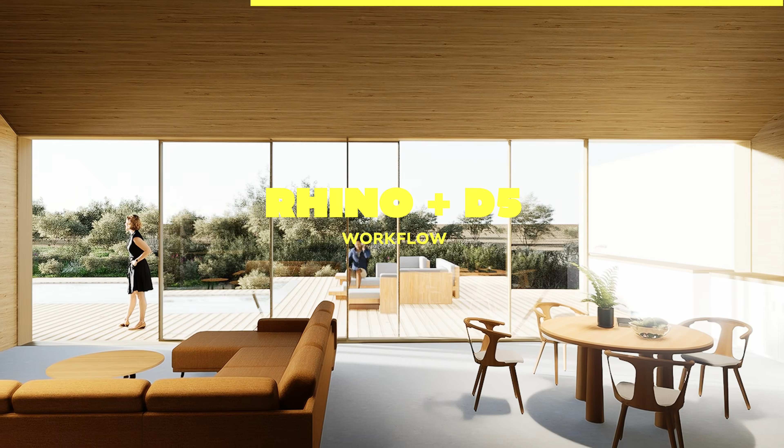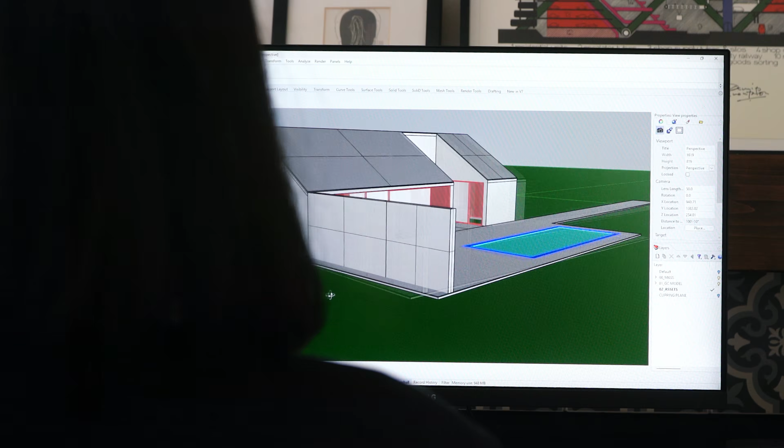Most architecture projects follow the same journey. It starts with an idea, then a model, then visualization, and then finally a presentation. But somewhere along the way, we end up spending almost as much time moving files between different software as we do actually designing. So when D5 invited me to try their new Rhino workflow, I wanted to answer one simple question: can one workflow really take a project from concept to visualization to client presentation without ever leaving Rhino and D5? In this video, I'm putting this workflow to the test.

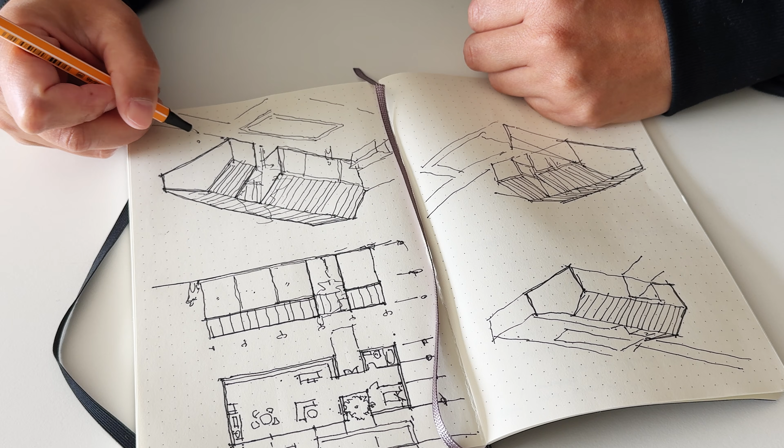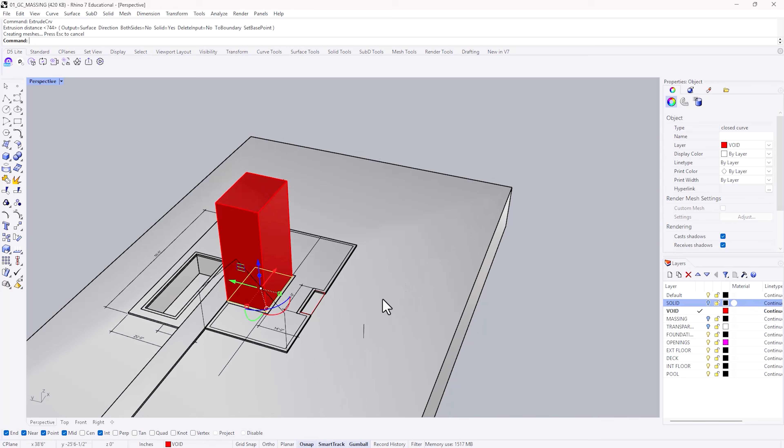When I start a project, I usually begin with a sketch, and then I move into Rhino to explore different massing ideas. It's the stage where I'm testing proportions, refining the form, and figuring out how the building fits together. At this point, I'm constantly making changes. I'll move a wall, adjust a roof line, rethink an opening, or even change the entire massing. It's a very iterative process.

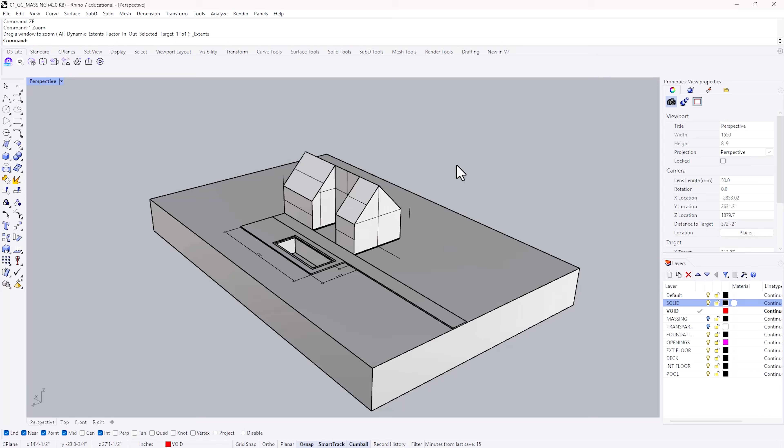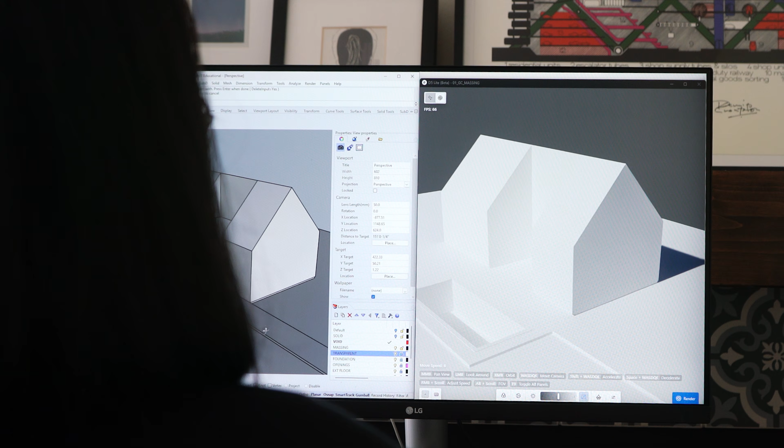The problem is visualization usually doesn't happen until much later. Traditionally, if I wanted to see what these ideas actually look like, I have to stop designing, export the model, open another application, wait for everything to sync, and then start building the scene. It might not sound like a big deal, but when you're making dozens of small design decisions, this interruption really starts to add up. And every time I leave the modeling environment, I lose a little bit of that creative momentum. Instead of asking, is this the right design, my workflow is interrupted.

One thing I've learned over the years is that the earlier I can experience a design, the better my design decisions become. Drawings tell me how a building is organized, but visualization tells me how it might actually feel. If I can get that feedback while I'm still designing, not after the design is finished, that's a workflow I'm interested in.

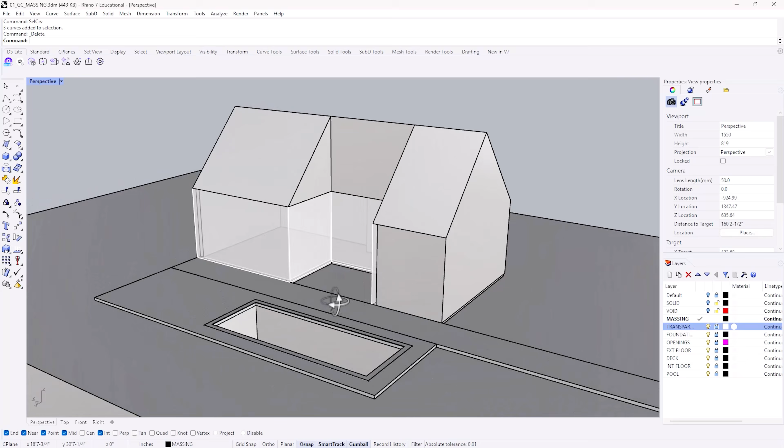Let's start with the new D5 Lite for Rhino. Instead of waiting until the project is finished, I can start visualizing the project while I'm still designing without ever leaving Rhino. At this point, the architecture is still very simple. I'm not thinking about materials or polished renderings quite yet. I'm just trying to understand the building.

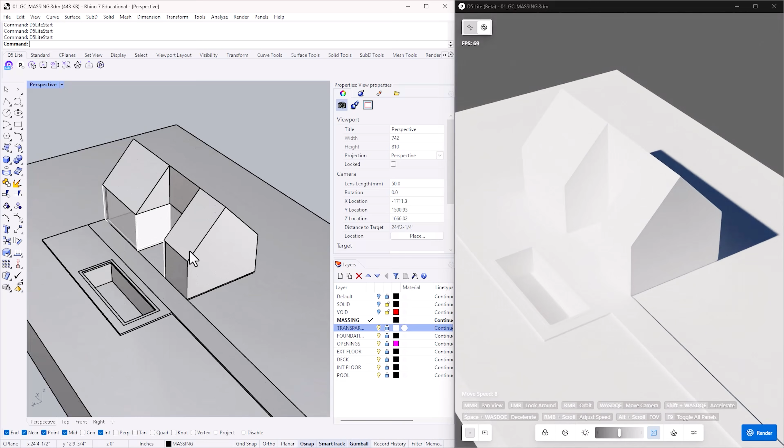To launch D5 Lite, simply open the D5 Lite tab in Rhino and then click Launch. As I continue working in Rhino, D5 Lite gives me a live preview, so every design change updates in real time. Once I find a view that I like, I can save it directly in the scene list in D5.

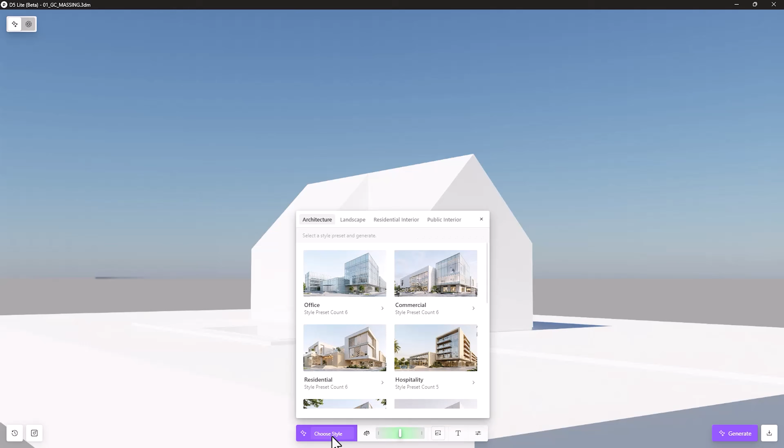Now let's try the AI mode to quickly explore different design ideas. I'll start by selecting a preset style. For this project, I'll choose architecture, residential, then villa. I can also adjust the structure weight depending on how closely I want the result to follow my original model. I'll set it to creative to explore a wider range of possibilities. I can also add a reference image or even write a text prompt to guide the generation. Once everything is set, let's generate a few concepts.

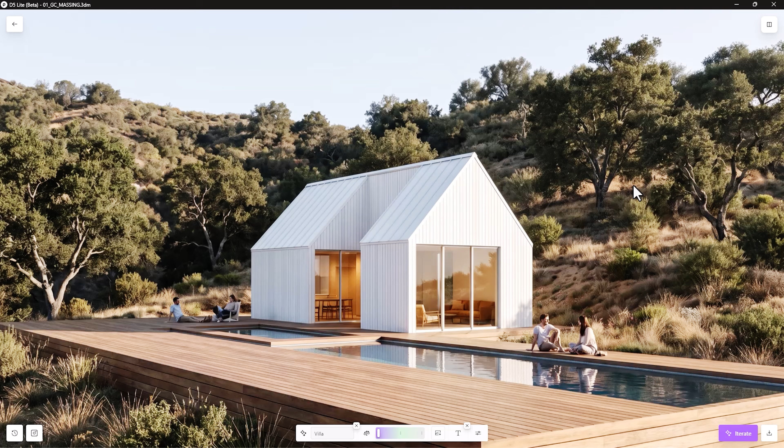Instead of spending time building every detail, I can quickly explore different visual directions from the model I'm already working on. It's not about replacing the design process. It's about exploring possibilities I might not even consider on my own. Sometimes it reinforces the direction that I'm already heading. Other times it encourages me to ask, what if I tried this instead? Either way, it gives me valuable feedback much earlier than the usual workflow.

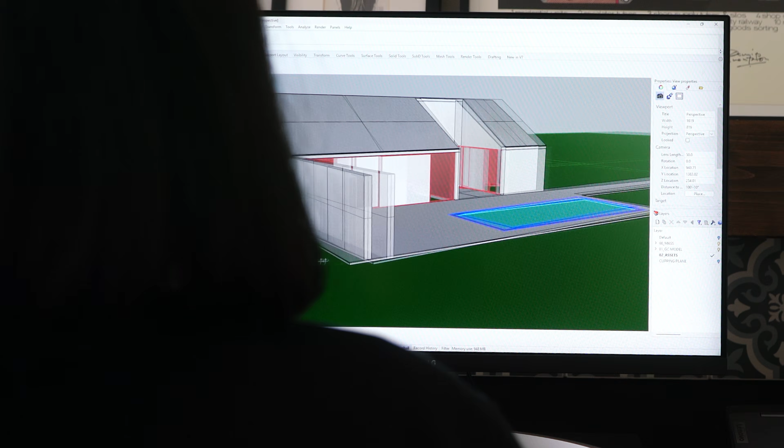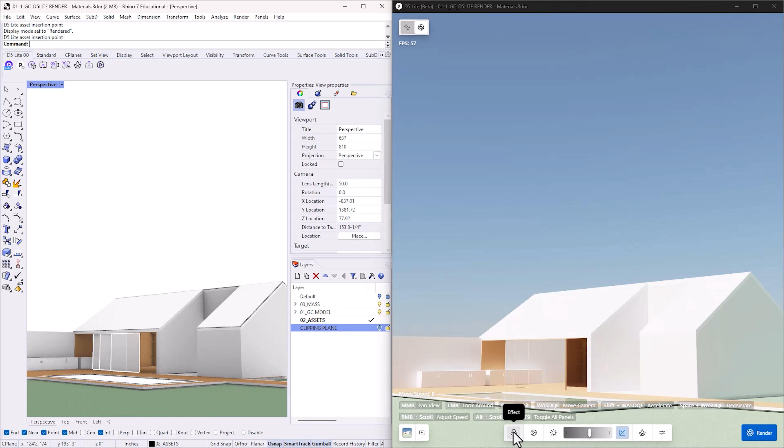Based on the AI feedback, I made a few adjustments to my model. Once I have a direction I like, I can switch over to render mode to create a quick image of the project. Even at this early stage, seeing the building with lighting, shadows, and basic materials changes how I evaluate the design. This is probably the biggest difference I've noticed so far. Visualization isn't becoming the final step anymore. It's becoming part of the design process. Instead of waiting until everything is modeled before seeing the project come to life, I'm getting feedback while the design is still evolving.

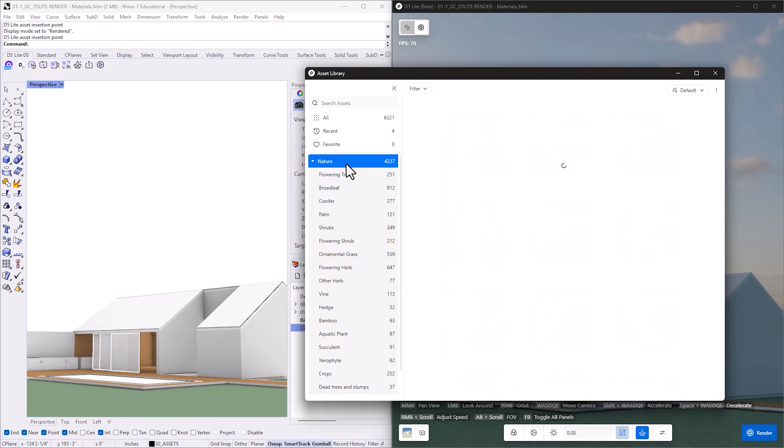And it's changing the way that I make design decisions. At this point, I'm generally happy with the overall direction of the design. I made further adjustments in my Rhino model. The form feels right, the layout is starting to come together, and I have a much better sense of the visualization I'm trying to create.

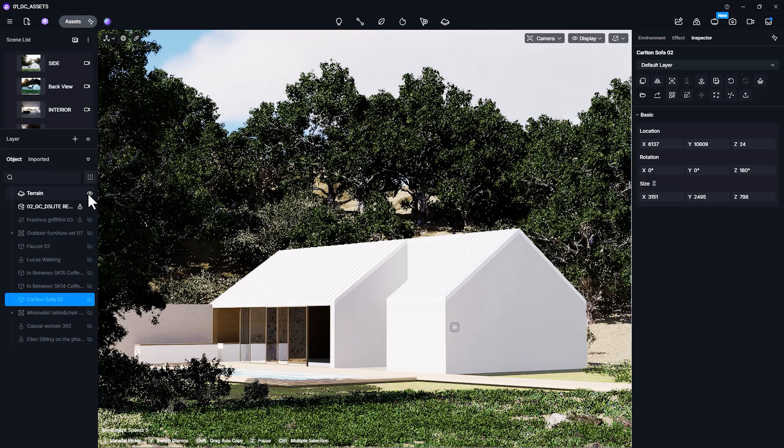But a building doesn't tell a story on its own. To communicate the space, I need people, furniture, vegetation, and all the little details that make the project feel believable. That's where I usually spend most of my time.

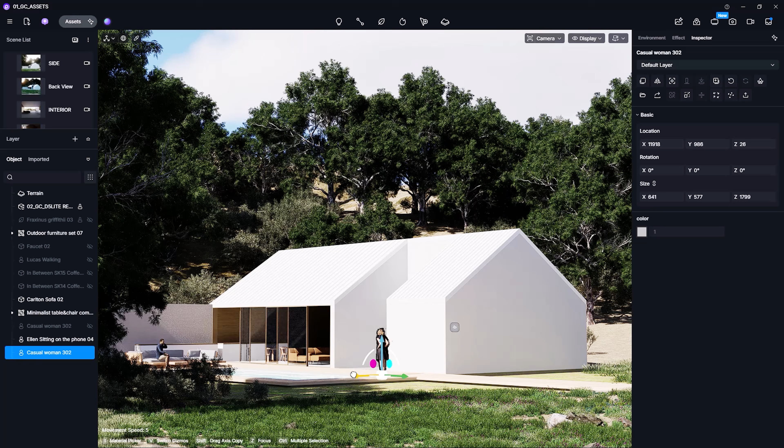Traditionally, this means searching through different asset libraries, but with D5 Works, these assets are built directly into the workflow. So instead of going to a variety of asset libraries to look for content, I can simply browse and get my asset in one place from different creators in D5 Works.

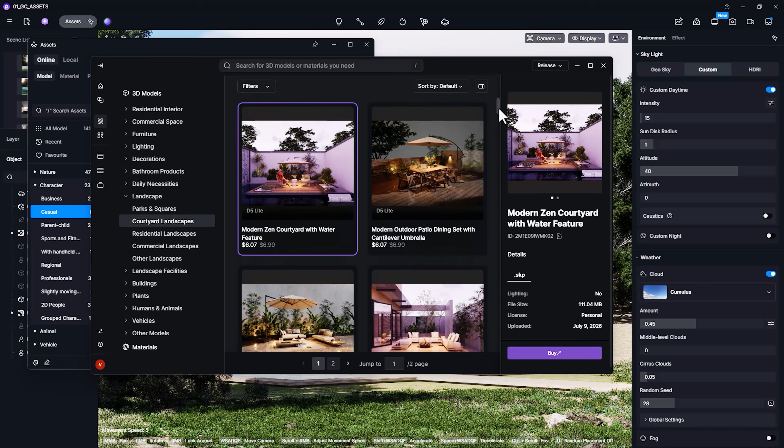In D5 Works, you can filter by file format, pricing, availability, file size, and license, which is super helpful when searching for the right assets. You can even upload your own custom asset into D5 Works.

At this point, the project is really starting to come together. The overall composition feels right, but this is where the smaller details begin to make a difference. I've continued to refine the design and made adjustments to my Rhino model. Now it's time to bring the project to life with D5.

D5 3.1 introduced a number of new tools that help refine the scene before it's ready for presentation. One feature that I really like is the seasonal vegetation. Instead of manually swapping trees and plants, I can quickly explore how the project looks throughout different times of the year. It's a simple addition, but it completely changed the mood and atmosphere of the rendering.

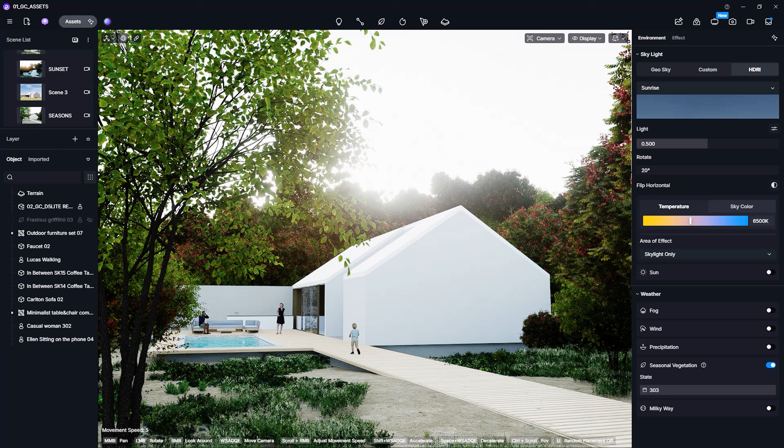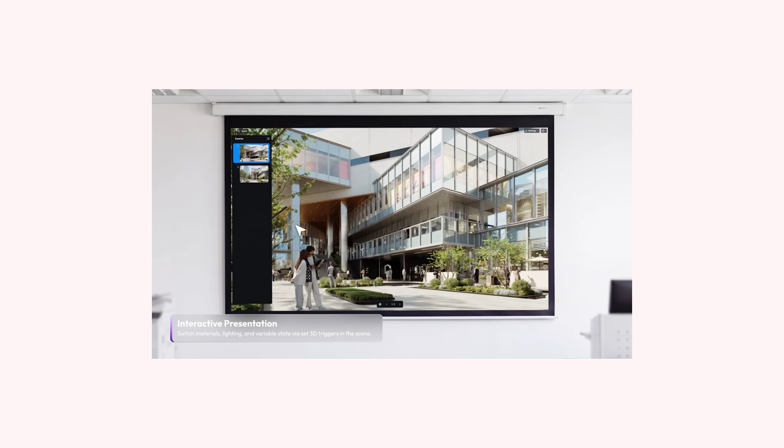But the update I found most helpful is the interactive presentation. This allows me to create and present different design options directly to my client. With my previous workflow, I had to export a series of renderings, build presentation slides in another application, then switch back and forth between different software.

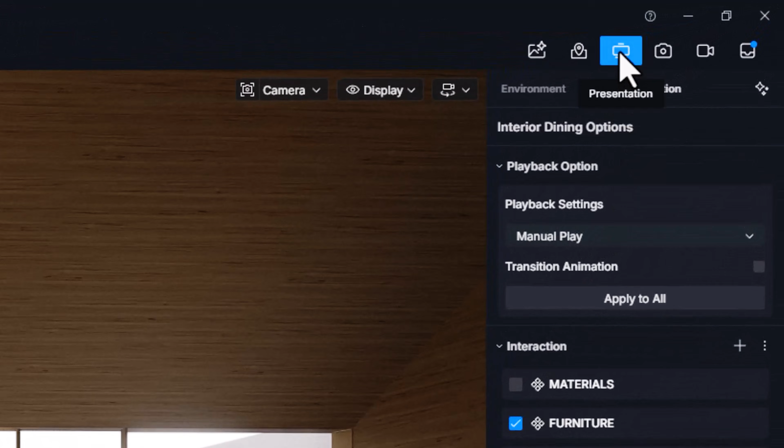With this new update, I can use D5 Render as my presentation tool, allowing me to show different design options without ever leaving D5. To do this, just go to the Presentation tab. Here, I already created my own slides with different design options. I can present different ideas to my client without ever leaving D5.

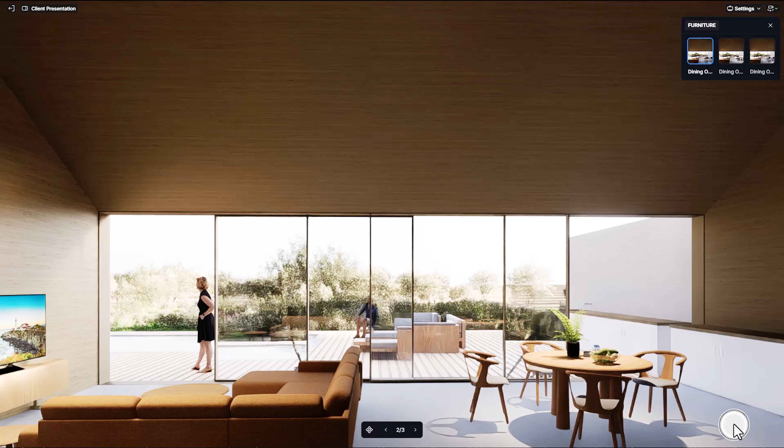You can toggle different material options within the slides, different furniture options, and even different time of day. It makes the entire process much more seamless. The presentation also becomes more interactive. Instead of clicking through a series of static images, I can explore different ideas together with my client in real time.

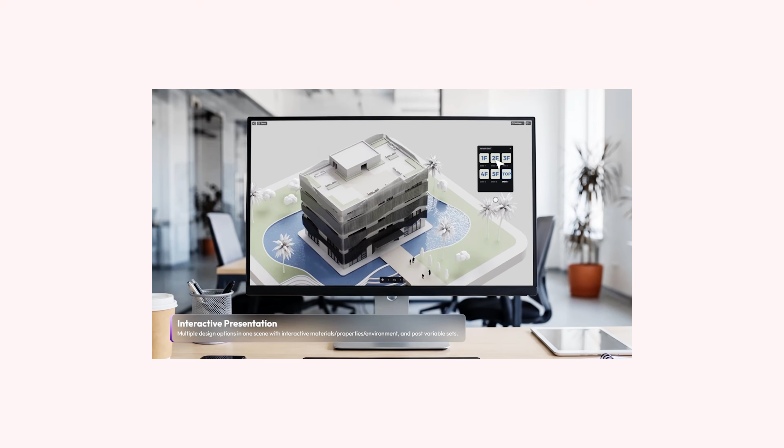So after taking this project from concept all the way to a client presentation, I can say this workflow really surprised me. What impressed me most wasn't just how quickly I could create beautiful visualization, it was how naturally everything is connected. Instead of treating visualization as the final step, D5 made it feel like part of the design process from the very beginning.

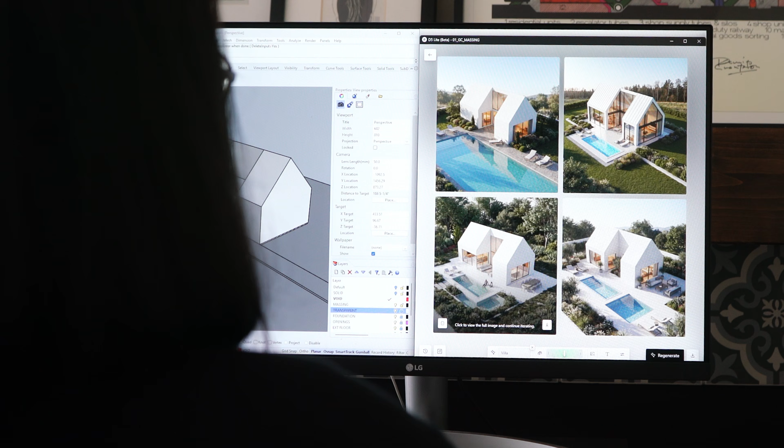I could explore ideas inside Rhino with D5 Lite, refine the project in D5 Render, bring the scenes to life with assets from D5 Works, and then present the entire project in an interactive way, all without feeling like I was constantly breaking my workflow.

The way you communicate your design is as important as the design itself. D5 3.1 isn't just about making better images. It's about creating a smoother connection between designing, visualizing, and presenting.

And after using this workflow from start to finish, I can definitely see myself bringing parts of it into my other future projects.